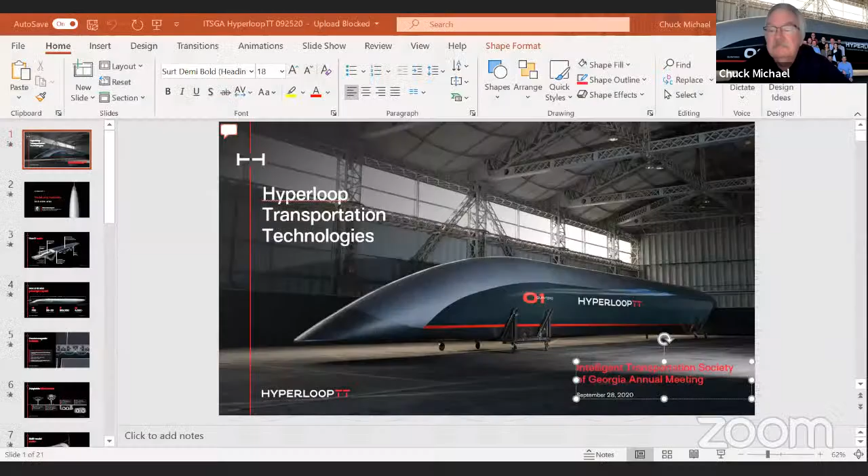As he said, my name is Chuck Michael. I'm with Hyperloop Transportation Technologies. We are based in Los Angeles. We have offices in Sao Paulo, Brazil, Barcelona, Spain, Toulouse, France, and in Dubai, in the Emirates. My role is to oversee all of the feasibility studies in North America, as well as the regulatory affairs. We're going to start today with a little technology background, so you can get an idea of what it is that we're building and the capabilities of that machine.

This is a Hyperloop system. This is an elevated section. It consists of two tubes and the capsules that go through the tubes. We start with a tube that is about 4 meters in diameter. We lower the pressure with a series of vacuum pumps down to a pressure of about 100 Pascal, which means almost all of the air is removed from the tube. And this reduces all of the aerodynamic drag and air resistance inside the tube.

The next is the capsule. It's designed as an airplane fuselage, although it has no wings and no engine. It's a pressure vessel that is levitated with a passive magnetic levitation system I'll get into in a few minutes, as well as propulsion through a linear motor. So since we've levitated the capsule, we have reduced all of the friction. By removing all of the air in the tube, we have reduced all of the aerodynamic drag. And now with the linear motor, we can propel that capsule up to a speed of around 760 miles per hour.

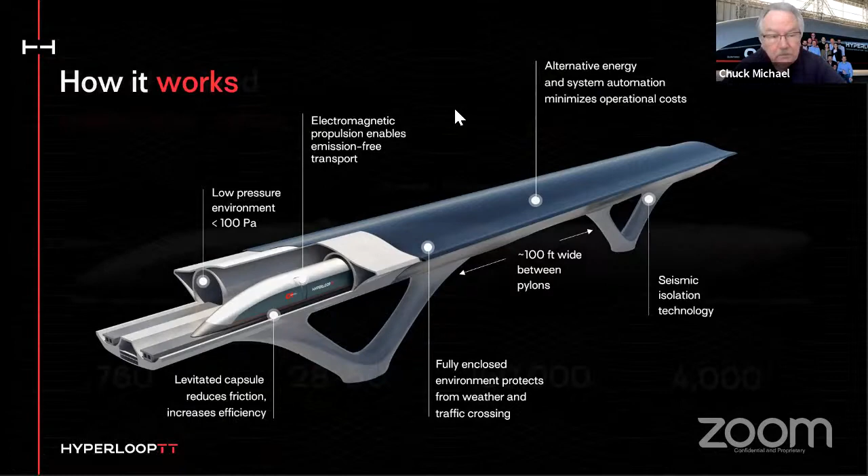Again, this is the capsule. It weighs about 20 tons. The passive magnetic levitation system was developed by Lawrence Livermore Labs, and we have an exclusive license to that technology. Again, the maximum speed is about 760 miles per hour. Each capsule will hold about 28 to 50 passengers and is capable of transporting around 160,000 passengers per day.

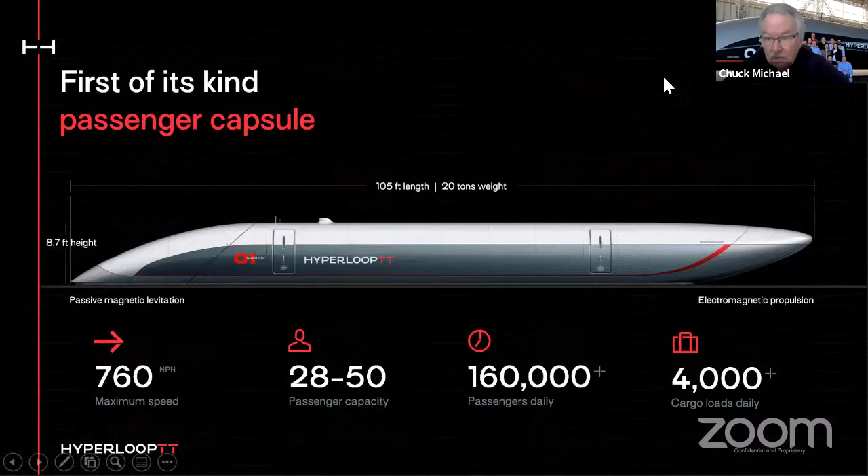Let's go back to the levitation system. This is the fun part. It's interesting that the levitation system requires no energy input at all. The passive magnetic system uses permanent magnets set in a special array, or how we stack all the magnets. This is called a Halbach array. And the Halbach array gives us levitation once we have some movement in the capsule.

So as the capsule moves forward, the magnetic field is generated. The magnetic field gives us levitation. And again, we can levitate a 20-ton capsule with virtually no energy input. We recover energy through regenerative braking, eddy current braking. It's an extremely energy efficient transportation system.

The infrastructure, there's a variety of applications for the infrastructure. On the left is a typical elevated section. This could be used out in the country someplace or in a highway right-of-way. This is elevated usually around 25 to 30 feet, depending on the bridge standards of the state that we're working in. We have two 4-meter diameter tubes with a cladding that includes solar panels on the top.

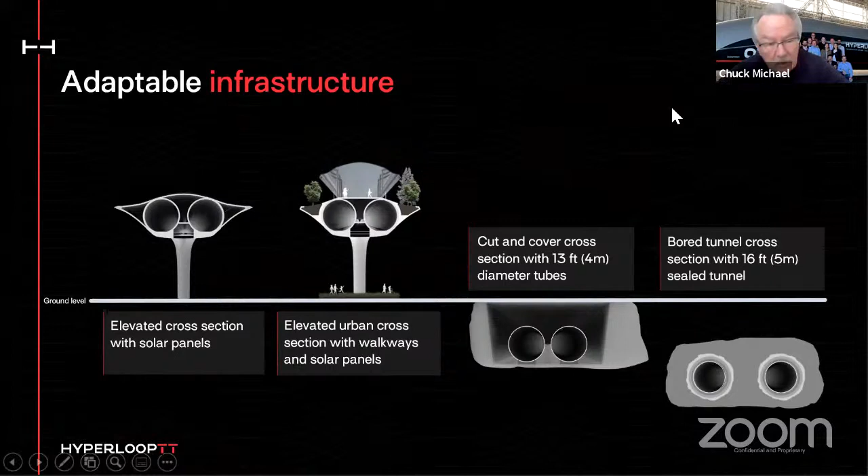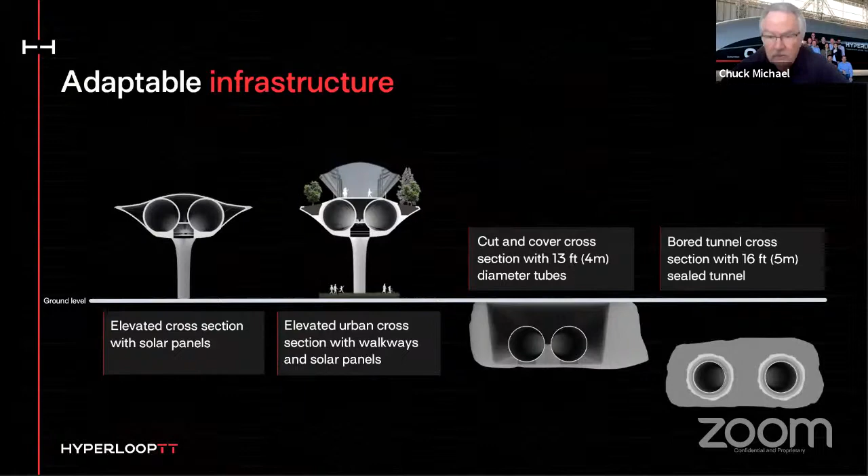And in that way, we can go through a densely populated urban area without acquiring right-of-way in terms of property acquisitions. We can go under a city, and in some cases, there are some stations that are designed underground so that there's no modifications to the surface that are necessary.

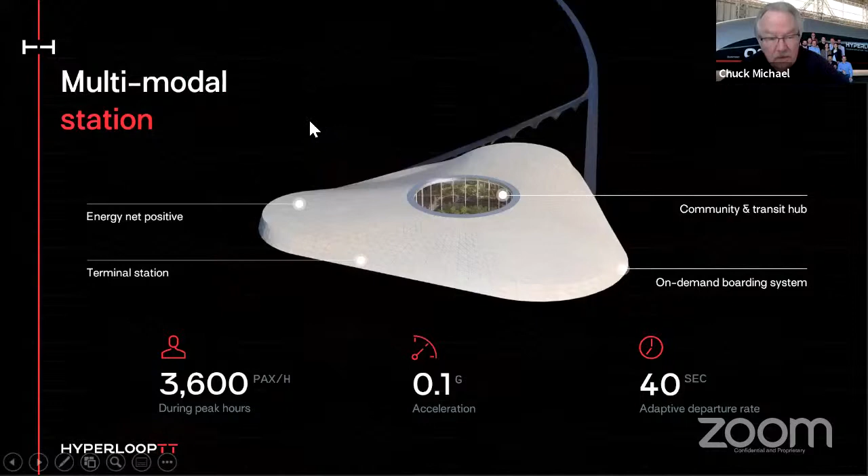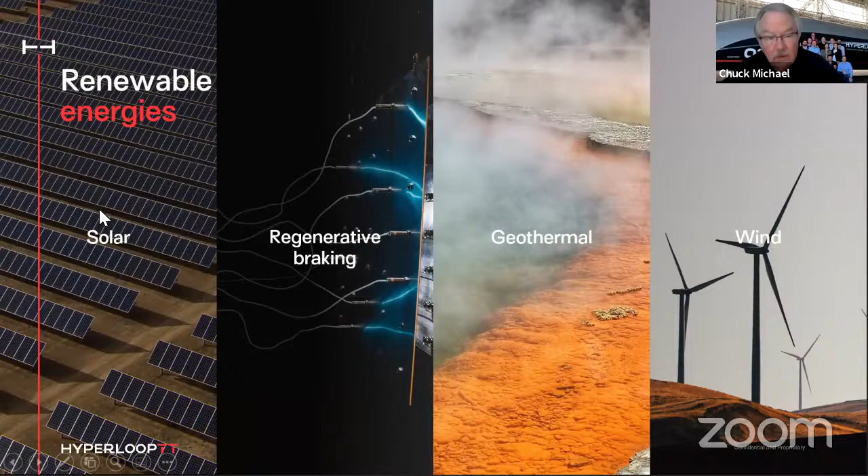This is what a typical station looks like, around 3,600 passengers per hour. We limit the acceleration on the Hyperloop to about 0.1 G, and we do that because it's a passenger experience, passenger comfort issue for us. If you're going up to 760 miles an hour, you really don't have to get there that fast because you're going to be faster than anything on Earth as it is. Again, the renewable energies, we can use solar or regenerative braking, geothermal energy, or wind for any of the projects.

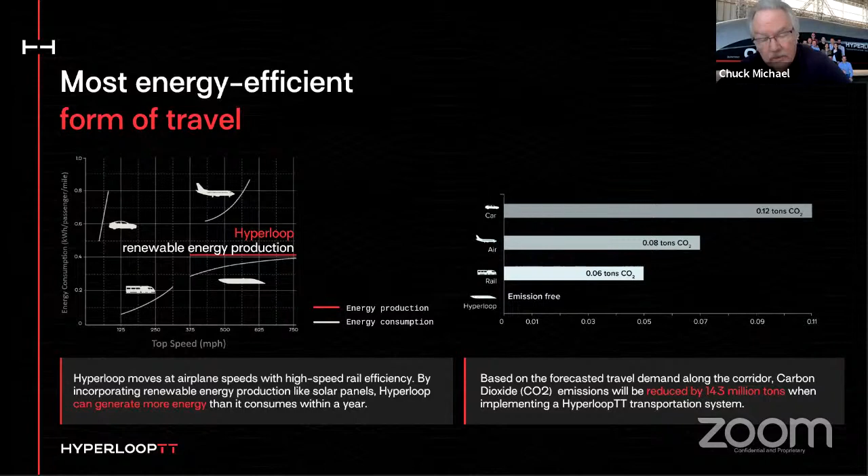On the right side is the carbon emissions, a comparison between automobiles and aircraft and rail and Hyperloop. And this one's an easy one for us because we have virtually no carbon emissions at all.

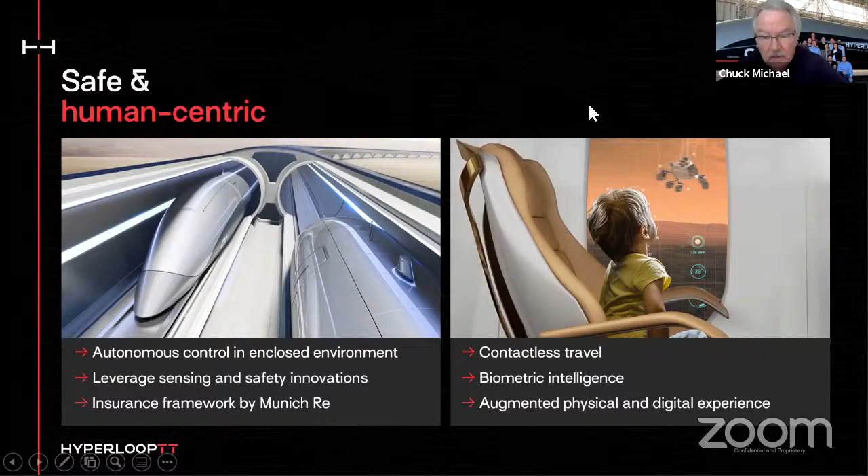On the right side, we don't have windows because we're in a sealed tube, although we created our own windows in an augmented reality. And these are programmable windows that you can program if you want to see the Swiss Alps or you want to see cows going by or a cityscape. You can program that into your viewing area. It won't show anything going at 760 miles an hour because your brain really has difficulty processing that. So we're down in the 65 to 70 mile an hour range to watch the cows.

Hyperloop is happening now in Toulouse, France. We have built a full-scale test center there at an old airfield, completed in 2019. We are doing the testing and certification of our technologies there. We have the integration and optimization phase, which takes about 1.5 years to finish, and we're about 1 year into it. So we're getting close to finishing everything up to a passenger-ready system.

We have a commercial prototype under development in Abu Dhabi. The concept design has been completed, and that will be a 3 to 5 kilometer passenger Hyperloop that extends from the expo site in the northern part of Abu Dhabi, as well as close to Al Maktoum Airport, the new international airport.

On the right side is a cargo program that we've developed in Port of Hamburg in cooperation with HHLA, who's a major port operator there. That is a fully autonomous system, and it's going to be fascinating to watch that system grow.

In terms of the regulatory framework, which is certainly a challenge for any new technology, we have worked with Munich Re, the world's largest reinsurance company, and they have helped us develop an insurance framework. At the end of the evaluation, they determined that our design and technology is insurable, so now we have that to move forward with.

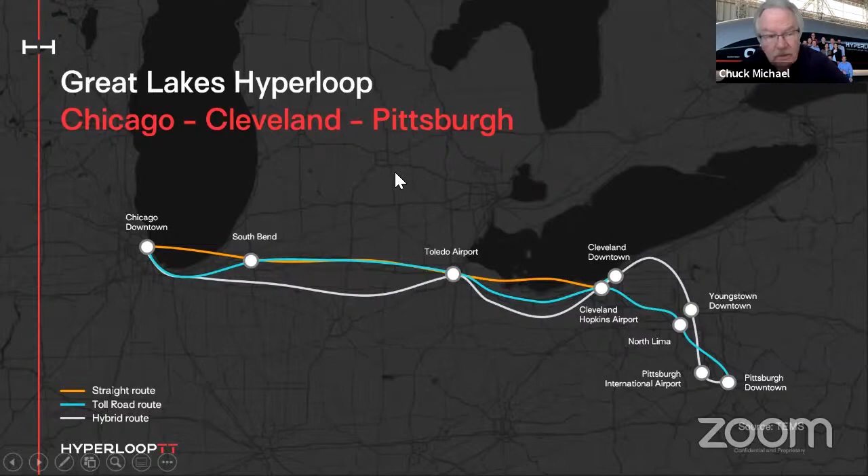We did a cost estimate that was evaluated independently. It comes out to about $55 to $60 million per mile. For comparison, other technologies and other areas of the country see different cost ranges, but that is what is published in the report.

In terms of the economic impact, it's significant. Those of you who work in transit-oriented development know that when you have a station nearby, especially a major station in a major metropolitan area, there's significant real estate development and jobs that come into the area. So we have around $47 billion in increased income, $74 billion in property value increase, and around $12 billion or more in expanded tax base for local, state, and federal taxes.

One of the secrets to the organization of this project is really a partnership. We started about a year early, before the feasibility study was initiated, developing a consortium of those interested in seeing the Hyperloop developed in their region. We have about 80 members of this consortium.

It's called the Great Lakes Hyperloop Consortium. It includes MPOs and DOTs from 4 states: Pennsylvania, Ohio, Indiana, and Illinois. The DOTs were funding partners, as were the tollway authorities in a couple of states. Other funding partners included the regional MPO in Cleveland, the Northeast Ohio Area-Wide Coordinating Agency, the Richard King Mellon Foundation out of Pittsburgh, and the Cleveland Foundation in Cleveland, Ohio.

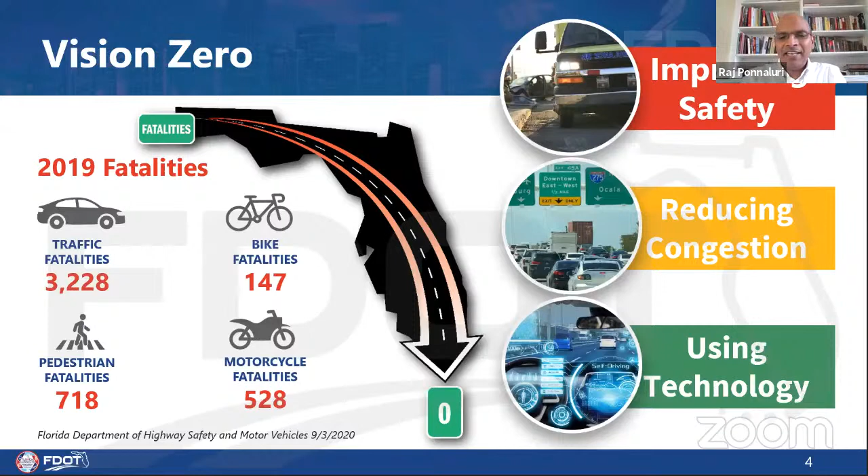We also see emerging technologies as playing a role not only in improving safety, but also in reducing traffic congestion. I'm sure many of you have heard the statistic that 94% of traffic fatalities are due to human error. Even if half of that is true, then obviously technology has a significant role to play.

So what are the CAV elements? When we talk about connected and automated vehicles, what exactly are we talking about? Strictly from a components point of view, we hear about roadside units, onboard units, we need a good communications network, good traffic signal controllers, a good ITS system, and the fiber optic backbone. There are many components that go into making a CAV program successful. And when it comes to data, there are numerous data types - I'm not going to enumerate all of them, but the point is that CAV is a combination of many things: it's about the CAV technologies, the CAV equipment, the CAV data types, and last but not least, the type of applications we're going to choose.

Are we interested in moving transit through a system? Transit signal priority. Are we interested in moving freight through our roadway network? Freight signal priority is a good application. Are we talking about having the emergency vehicles move from point A to point B with minimal to zero friction in the system? Emergency vehicle preemption. Bicycle pedestrian detection is another one. We all hear about SPaT, MAP, etc.

So there's many ways of thinking and looking at CAV. I'm just trying to present to you that there are many standards that are relevant to CAV deployments. I'm not going to list all of them, but there's numerous things that are happening in the CAV technology as of today. When it comes to automated driving assistive systems, there's always the question, should state DOTs and public agencies invest in these technologies? Well, it is as simple as this.

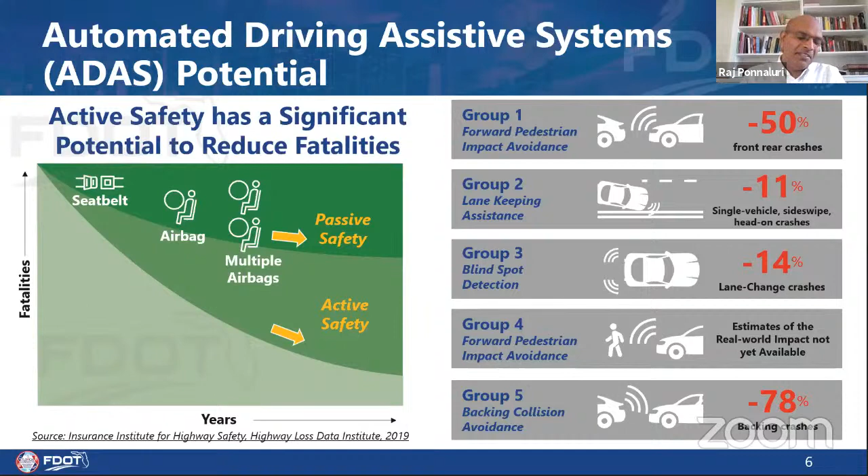I have seen personal benefits with a blind spot warning, and I should say it eliminated a potential crash that would have happened to me. I can go on and on. In other words, we all personally experience the role of technology in addressing safety and also improving mobility on a regular basis. The question is, why don't we expand and scale them up to improve safety and mobility overall in our transportation system?

I said enough about safety and mobility, but connected and automated vehicles also have a role to play with economic development. Our elected representatives, our leaders, truly want to have economic development in our respective states. And that means to bring about workforce development, we need to have technologies too. The new young generation are interested in technology and they want to work in an environment where technology is very much at their fingertips. The point once again is that when emerging technologies are here, why don't we embrace them and implement them to improve safety, mobility, economic development, and also from an environmental friendliness standpoint.

Policies and governance is one of the first ones. In other words, we need to have the leadership support. We need to understand the priorities with the leadership. What kind of policies need to be adopted with complete streets? What exactly is the leadership wanting us to do? So understanding the policies is an important process. Setting the right kind of organizational framework, in other words, a governance system, is important. And when you have a good policies and governance approach, that is when program funding becomes easy.

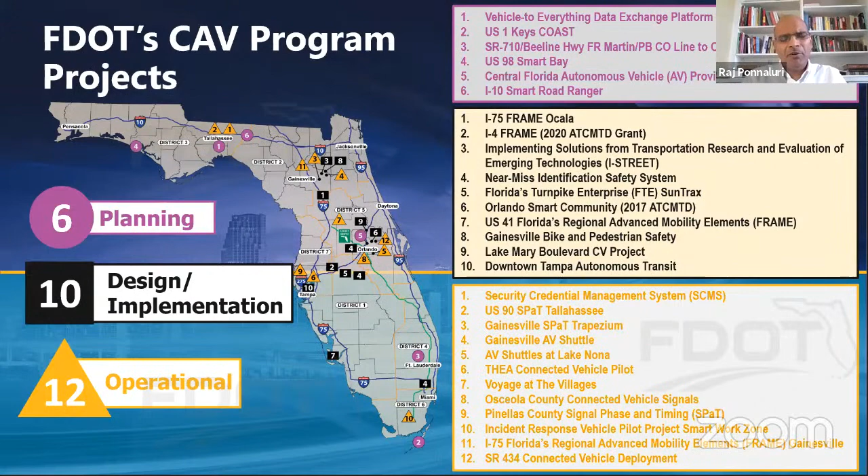So if you look around the state, there are numerous projects in all the 8 districts of the Florida DOT. Many of them are Florida DOT led. Some of them are in partnership with others. You see projects like the AV shuttle. You see projects like the SPaT and MAP efforts that are being deployed. You look at the Smart Road Ranger project that is being discussed. So there are numerous initiatives underway here in the state of Florida, not to forget the SunTrax system, which is being developed by the Florida Turnpike Enterprise.

I'm sorry, this map is not very clear. I apologize for that. But there are 3 SPaT projects being displayed here. One is right here in Tallahassee, not far from Georgia. On the other side, the Gainesville Trapezium is a second SPaT project. And the third SPaT project, which you can't see properly, is the Pinellas County SPaT project just south of Tampa.

All these projects are different from each other. Tallahassee was just a plain vanilla SPaT and MAP. Gainesville had a value add, which is bicycle pedestrian collision warning, emergency vehicle preemption, transit signal priority, etc. Pinellas County, on the other hand, would probably experiment. I say probably because we're deploying it as we speak. We're going to have dual mode RSUs from Kapsch, and Gainesville is actually a Siemens project. So the Kapsch project is going to have a roadside unit with both C-V2X and DSRC. So we'll see how that is going to work.

Quickly moving on to the FRAME projects. As I said earlier, FRAME stands for Florida's Regional Advanced Mobility Elements. This project was conceptualized about 3.5 years ago, and it goes from Ocala, just north of Central Florida, all the way up to Gainesville in Alachua County, a 75-mile section of Interstate 75. This project has gone through the full systems engineering development process. 2 contractors are on board. The project is being deployed.

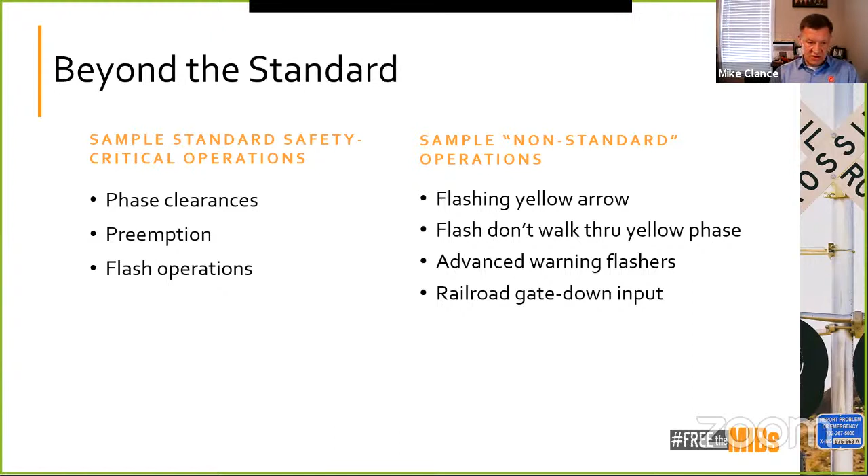The standard, meanwhile, was taking years to update and years to catch up. So different vendors have all implemented this separately, and vendor B's system may not support vendor A's devices for the flashing yellow arrow. So we're stuck in this situation where innovation is really kept tamped down, and we can't bring that new technology to our market, to our industry.

Looking at the numbers, if you look at a modern traffic signal controller, there are over 1,000 NTCIP objects defined that make available the data on that controller and allow you to set the parameters that then control the operations of that controller. Of those 1,000, about 75% of those objects are manufacturer specific or proprietary. They're not the standard mandatory objects.

If you look at the two standards that affect a signal controller, 1201 and 1202, they only define about 350 objects. So you can see there's a lot of functionality there that can't be accessed by a third party to show support for a particular device. So what has happened?

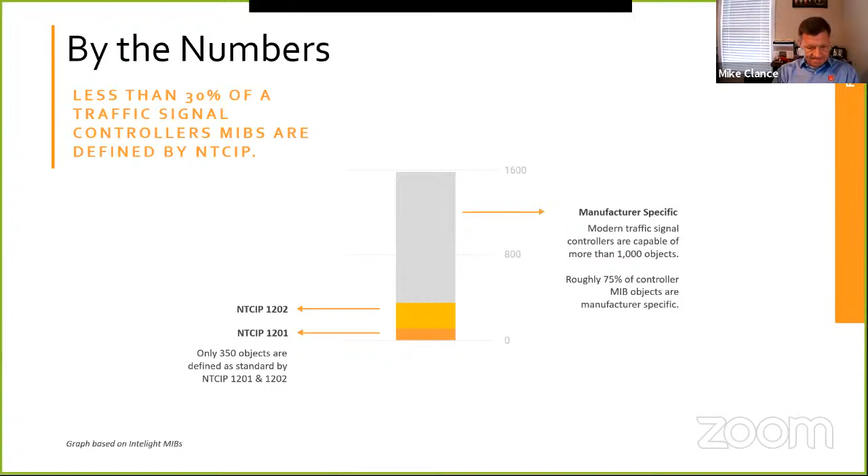Enter Free the MIBs. Free the MIBs is a collaborative campaign started by the industry, for the industry, to encourage not just traffic signal controller manufacturers, but ITS device manufacturers to share their complete MIB definition for their devices, to make it open to the public so that third parties can implement support in their systems for these devices and provide our customers, the public sector agencies, the greatest number of options for selecting the systems and the functionality that they want.